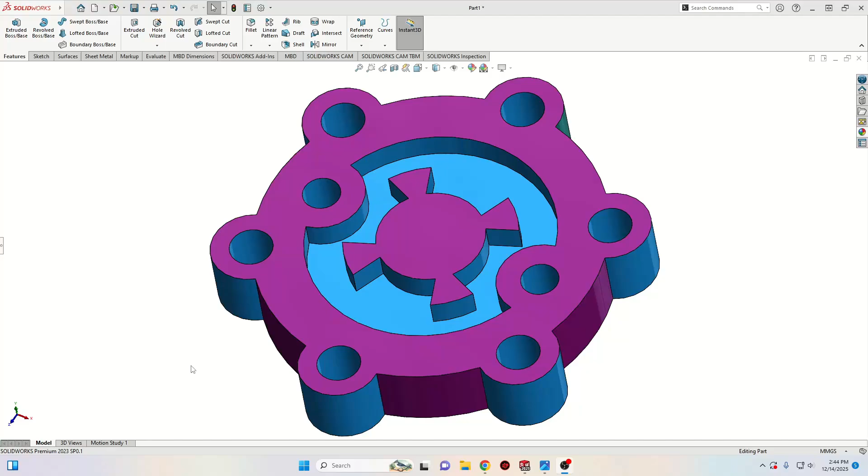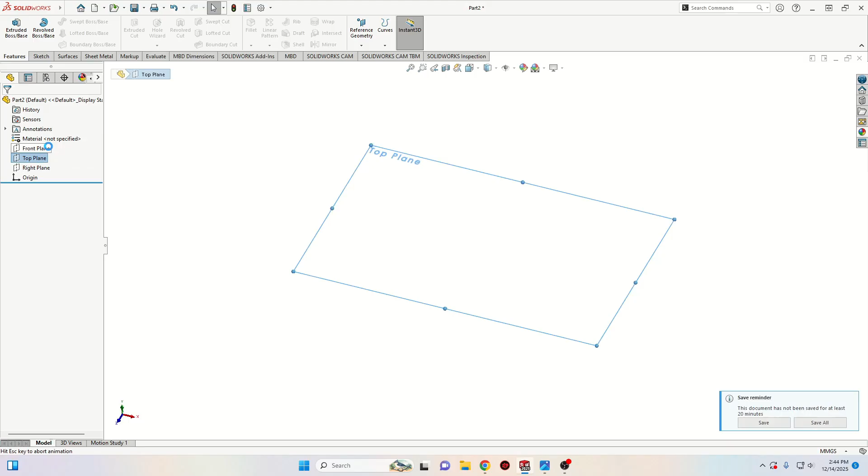Now let's start. First let's open a new SolidWorks document, select your part, and let's make this plain white. Now we'll start with a sketch in the top plane, and here we'll make a circle. This circle will have the diameter 130 millimeters.

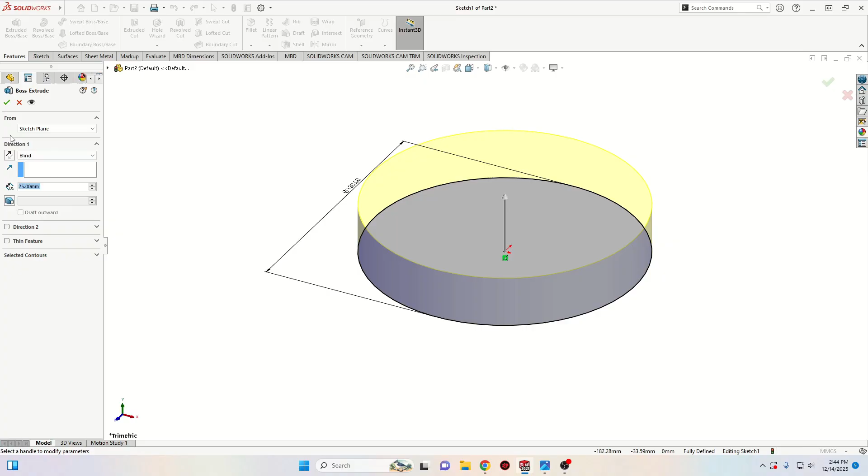Now let's go to features, use extruded boss base command, and here will be 25. Now press OK. And let's open a new circle on a new sketch on this face.

And here we'll make a new circle. Make sure that you make it on this edge. Select this center point with this one and select here make vertical. And now this will have the diameter 30 millimeters.

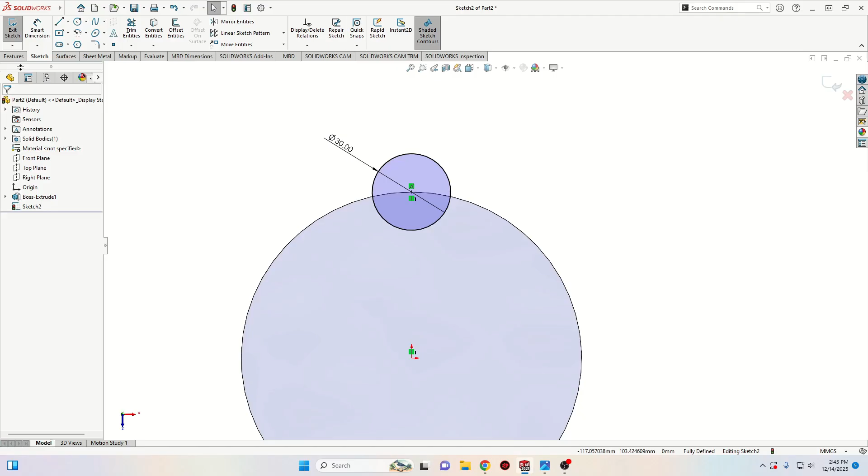Now go to features, use extruded boss base command. Will be the same depth here, only we'll have to reverse the direction. And press OK.

Now we're gonna use hole wizard command to make a hole right here. This hole have the diameter 16 millimeters. So we'll select this one, hole. We're gonna keep these settings. Here we're gonna select 16.

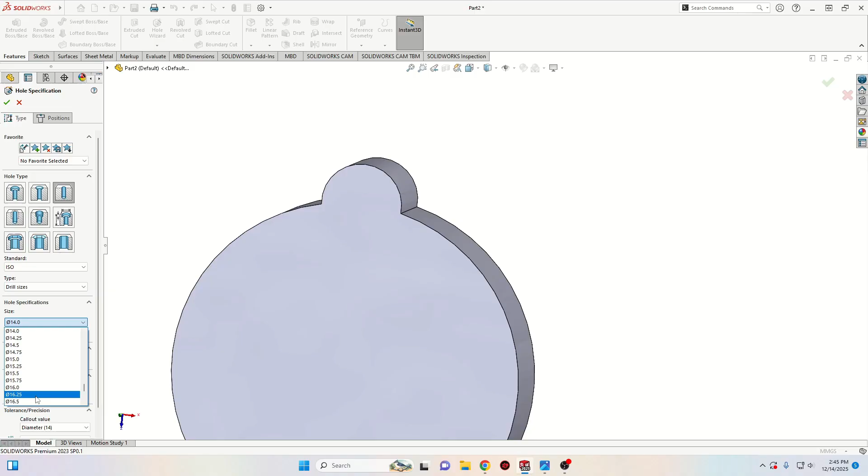Keep here through all. Go to positions, 3D sketch, and let's place it in this. Okay, so here should be a center point. Right here.

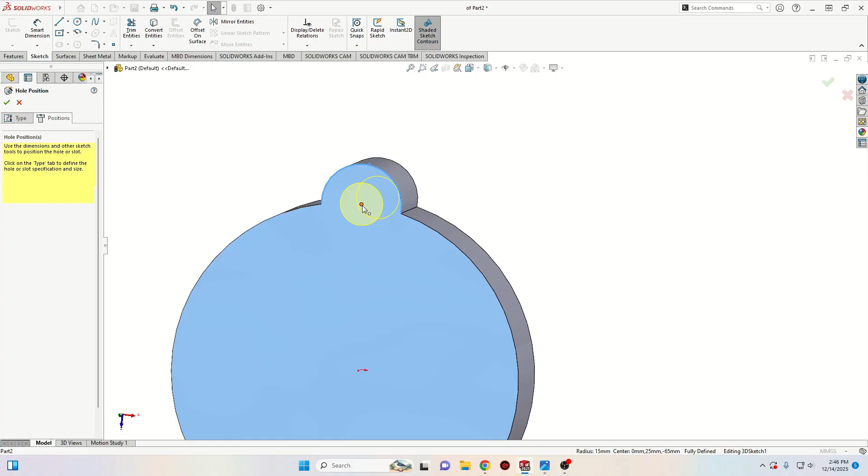If you cannot find that center point, place the hole on this face and then select this circle, this arc, and with Ctrl pressed, select this point and then select concentric. Alright, now press your OK.

Now I have to make 6 of them, 6 of these extruded parts and 6 of these holes. To do that, we're gonna use circular sketch pattern, actually not sketch, just circular pattern.

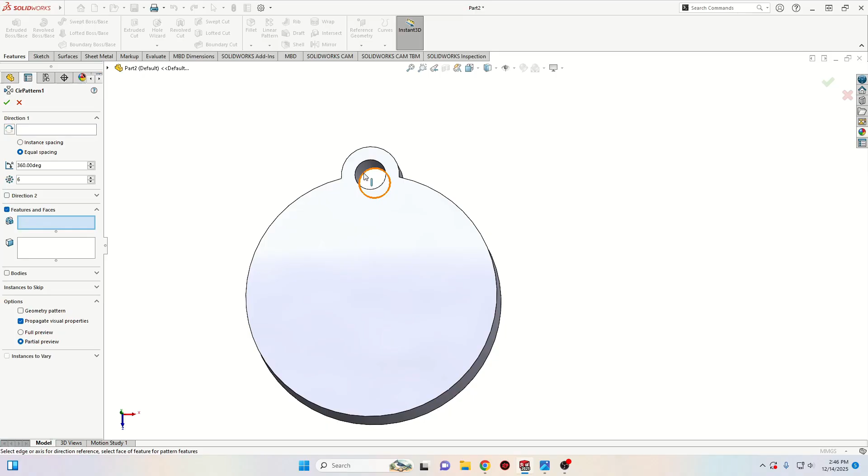The features to pattern will be this hole with this boss extruded. We'll have to select the boss extruded from here, go to this arrow, and then select boss extruded 2. Now here keep 6 instances, the direction, we're gonna select this edge, press OK, and you should have something like this.

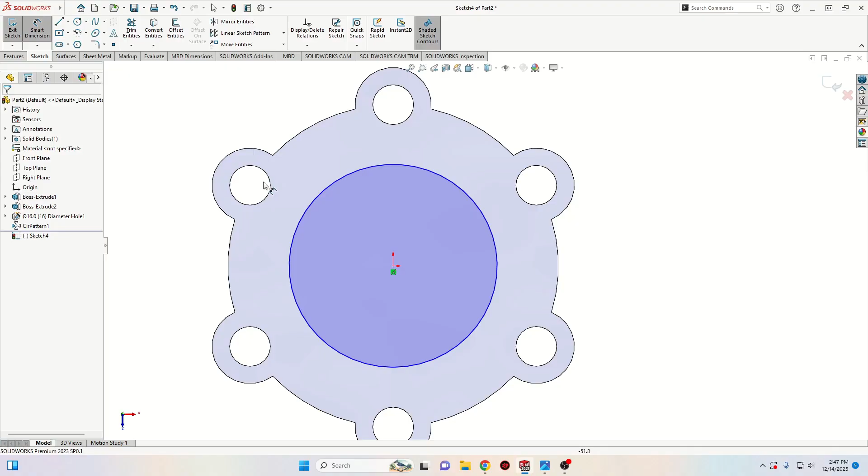Now let's select this face again and let's open a new sketch. Here we'll start with a circle. This circle will have the diameter 92 millimeters.

And now we're gonna select center point arc. We're gonna make one right here. Make one just like this. And then select center line. And let's make here a center line like this first.

Select this arc with this center line and then go up here to select mirror entities command. And now let's give a radius for this arc. This arc will have the radius 16 millimeters.

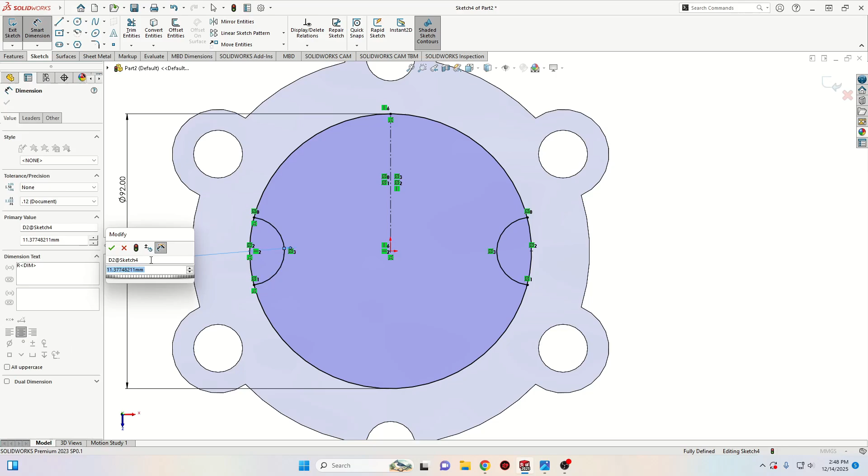Okay, now with trim entities command we can cut these extra parts. Alright, now select center line again. Let's make a new center line like this. Now with smart dimension, let's give an angle between these two center lines. And here should be 45 degrees.

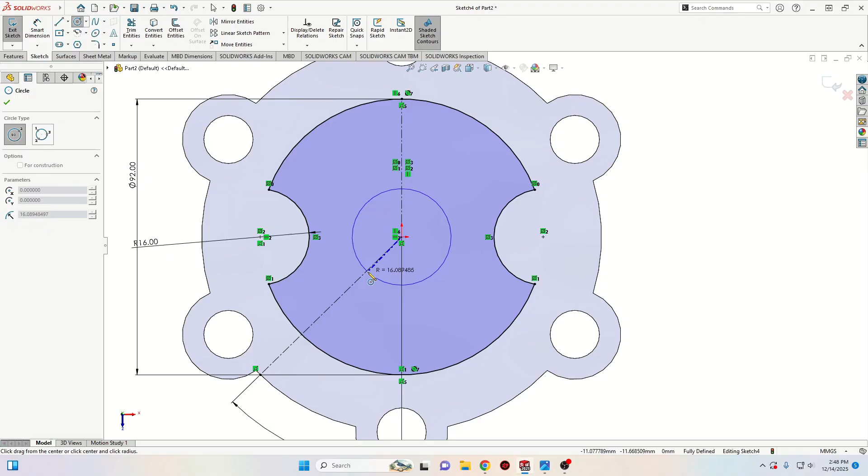Now select circle. We'll have to make 2 circles, just like this. And now with smart dimension, let's define them. First, the bigger one should have the diameter 64. And the small one should have the diameter 40.

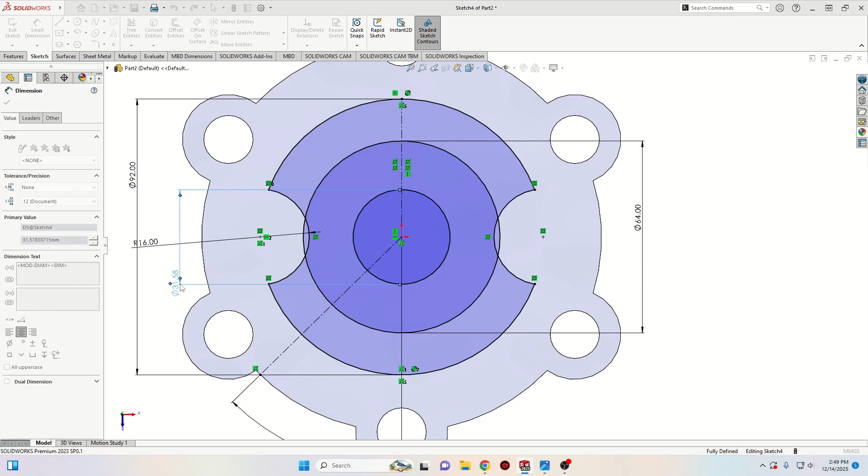Now what we'll have to do is to select line, and let's make here a line like this. Select this line with this center line and select here mirror entities command. Now select this point with this circle and select here coincident.

Okay, and now the next thing we'll have to do, let's see if it's working. Select this point with this one and select here make horizontal. Now with smart dimension, let's give a dimension from this point to this point, and here should be 16 millimeters.

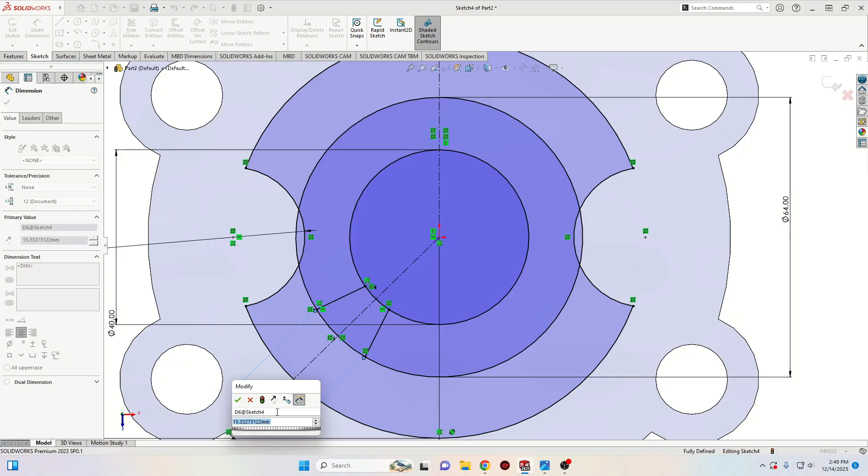And now we're gonna use a circular sketch pattern again. Select these two lines. This point should be selected here. The number of instances should be 4 and everything else should be kept the same.

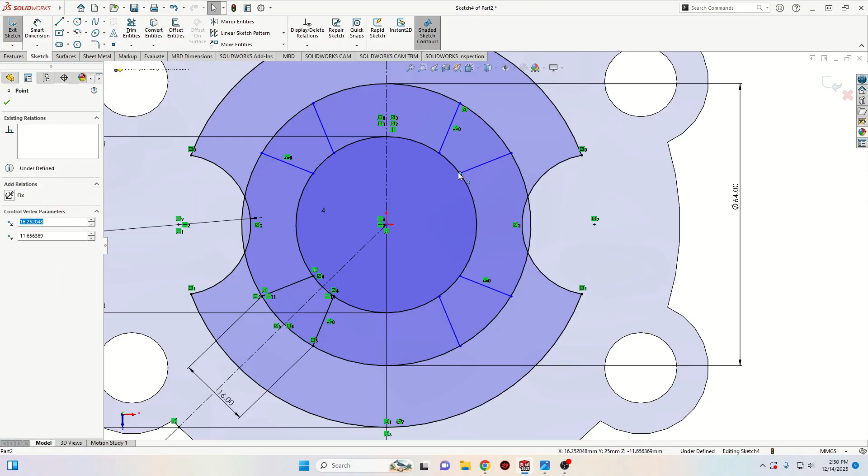Press OK. And now select this point with this circle, select here coincident, do the same with this one, coincident. Now we're gonna use trim entities command again to cut these extra parts from these circles. Here be careful, only cut this one, don't cut this one.

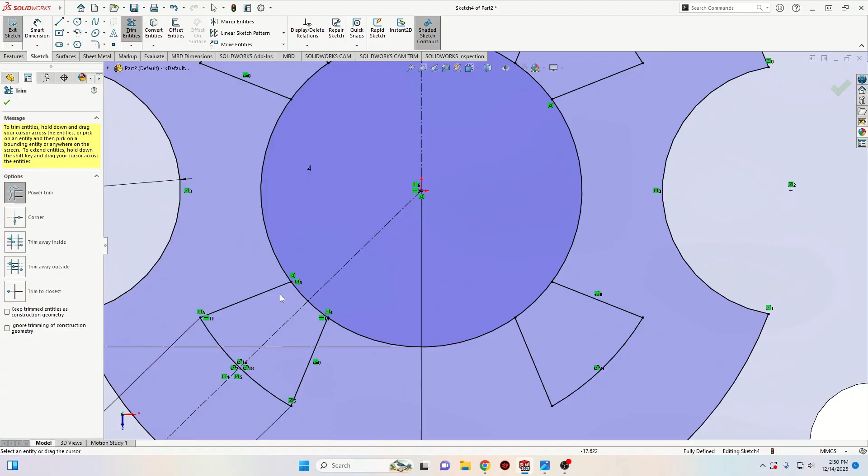So let's go ahead. And from inside cut this also. And now you should have a sketch that it's looking just like this.

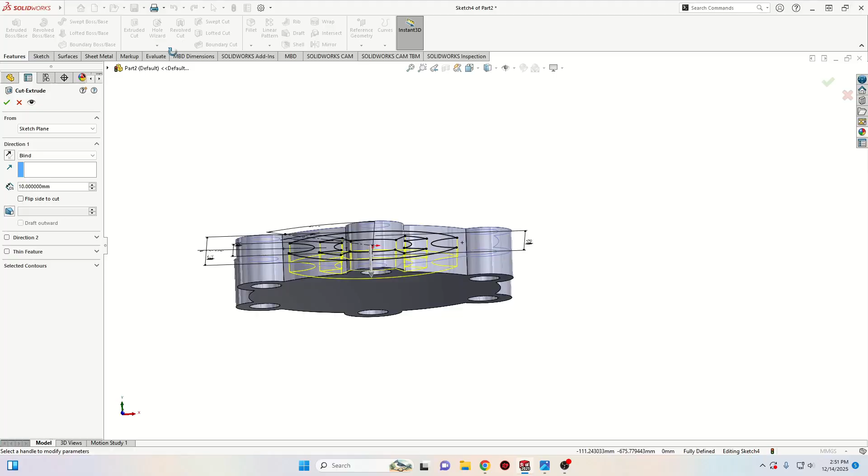Now the next thing, we'll go to features, use Extruded Cut, and here the depth will be 10 millimeters. And we can see here the preview. Press OK. Now this is looking good.

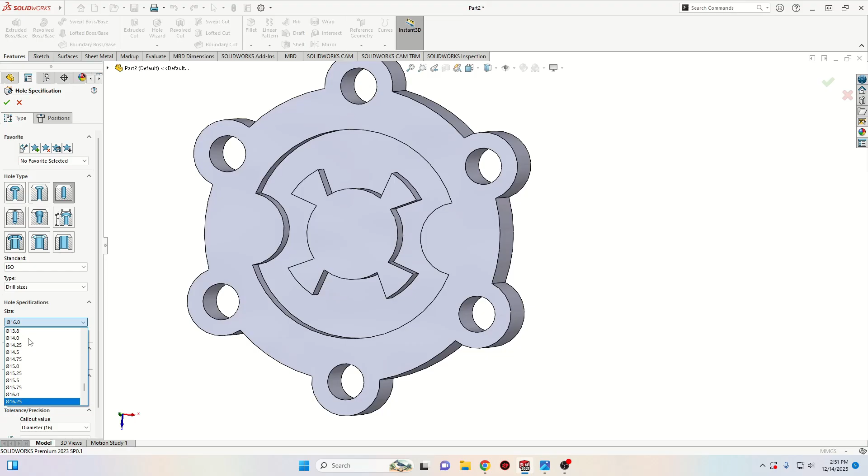The last thing that we'll have to do for this part to be finished is to make 2 holes in these 2 places. To do that, we're gonna use Hole Wizard again. The only thing we'll have to change here is the size, and it will be 14 millimeters. And now go to positions, 2D sketch, and let's just place it.

And we'll have to place them in these center points. Make sure that they are black, and then press OK. Nice. And now this is it.